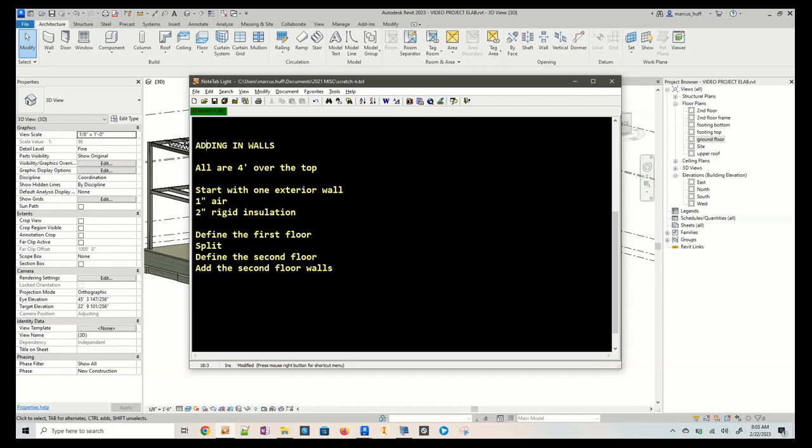When we're done, it'll look like this. We'll have single story, 2 story, and then a second story only, and everything is 4 foot above the level. The 4 foot wall acts like a rail.

So we're going to go to the ground floor and we're going to add a wall. First thing we need to do is make a custom wall. Click on this drop down and scroll to the top, find exterior brick and CMU on metal stud. We're going to edit the type.

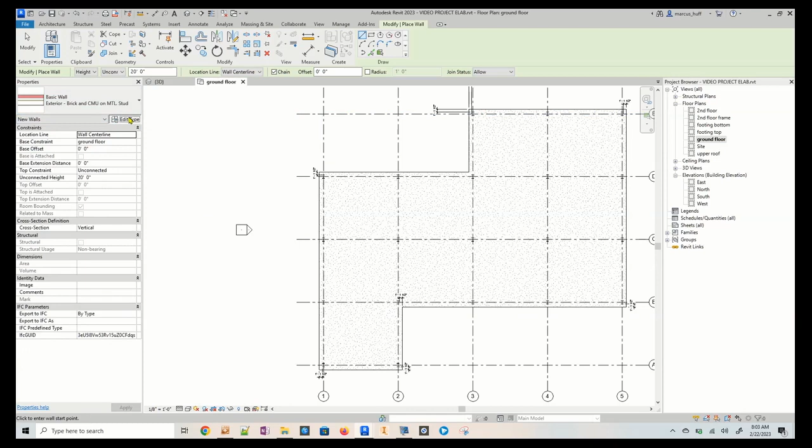Okay, let's take a look at what's going on here first. If you go to the preview, this is what modifying the wall looks like, but here's the section view, and you can see it's kind of fancy. It's got a cap and a soldier course and then some reveals and a different style of brick at the bottom. So we need to make a couple of changes here.

So we're going to start with this basic wall. I'm going to call it EXT wall number 1, because we're going to add a 2 and a 3, maybe a 4. Right here, if we go to edit, you can see we have a 3-inch air gap. It's a thermal insulation layer. So what we're going to do is change that air gap to 1 inch.

And then I'm going to insert a row and put it in the wrong place, so we're going to move it down. It needs to be after the air gap. We're going to change that to a thermal layer.

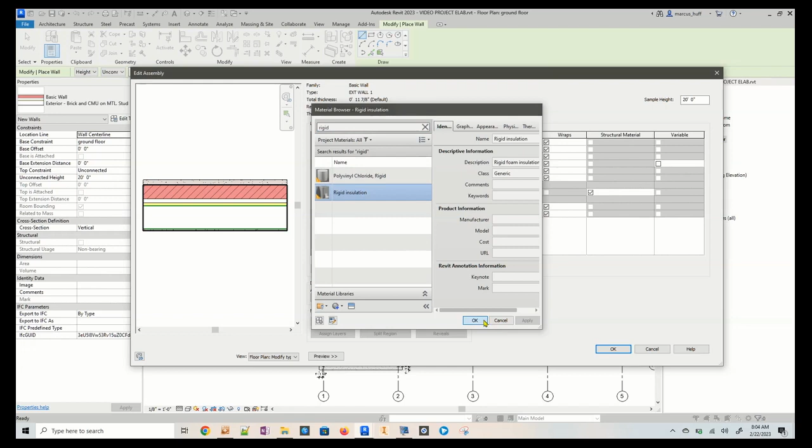So choose the drop down here, and then we're going to change the category, search for the word rigid. We're looking for rigid insulation. Okay, so there's our rigid insulation, select that. So we still have the same gap, but what we've done is added 2 inches of rigid insulation and a 1-inch air gap. The width didn't change, we just changed what the makeup was, okay?

What we're going to choose instead of center line, we're going to make sure we're connecting to exterior finished faces. We have chain set. If you have a rectangular building, just use the 2-point rectangle on your extreme corners. I don't have a rectangle, so I'm going to use the line tool connecting to the outside edges all the way around the building. Make sure I have that little pink square before I click, and make sure I'm following that outside line that I can see from my foundation.

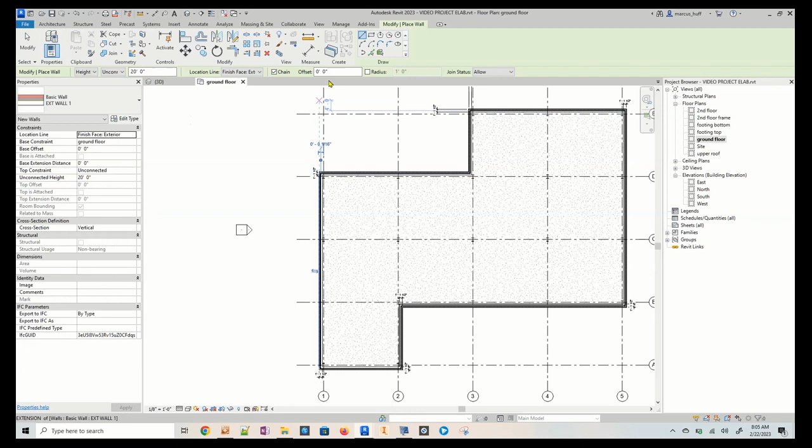And we're just connecting that to our foundation wall all the way around. I'm going to make sure that closes, and then I should be good on that. Hit escape a couple of times. Oh wait, it's not, it's unconnected. Okay, so let's go look at this in the 3D view. So what it did is it made a 20-foot unconnected wall, and that's not what we want.

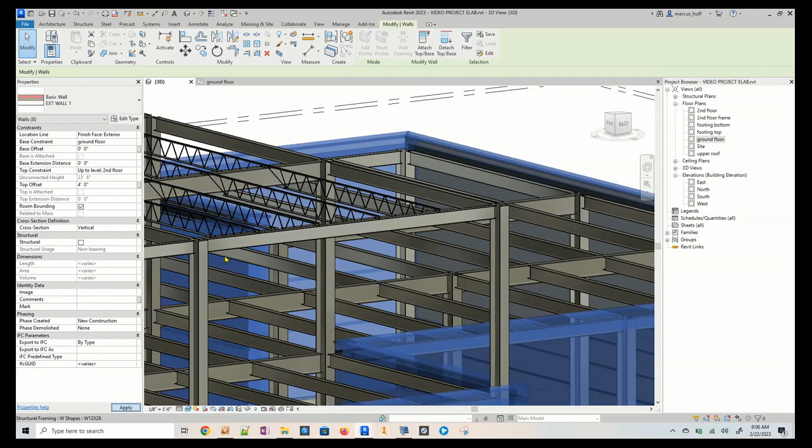We want to have it connected to the second floor with a 4-foot offset. So I'm going to select all of my walls that I just made, and then we're going to change top constraint to upper floor. No, I mean second floor. And we're going to make that 4-foot. So it's second floor and a 4-foot offset. This is going to establish a boundary around the building that acts like a rail for your green roof.

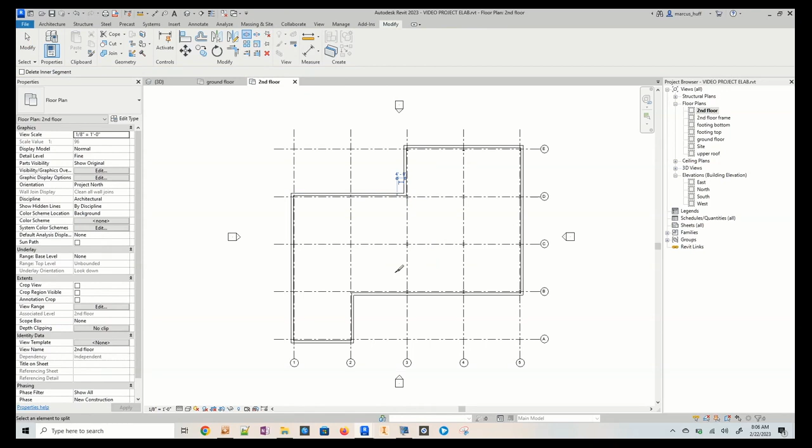But now we have a second floor that still needs to have a wall around it. So what we have to do is separate the first floor from the ones that have 2 floors. To do that, let's go to second floor, and we're going to click on a wall. Oh wait, set the view to fine for these steps because it's easier to do it this way. So make sure you're in view and fine. Choose a wall, and what we want to do is use the split element tool, and somewhere close to the second story wall, I'm going to split those 2 walls.

Okay, press escape a couple of times, zoom in, click on this little itty bitty wall, grab the little dot and drag it, and that will open a gap.

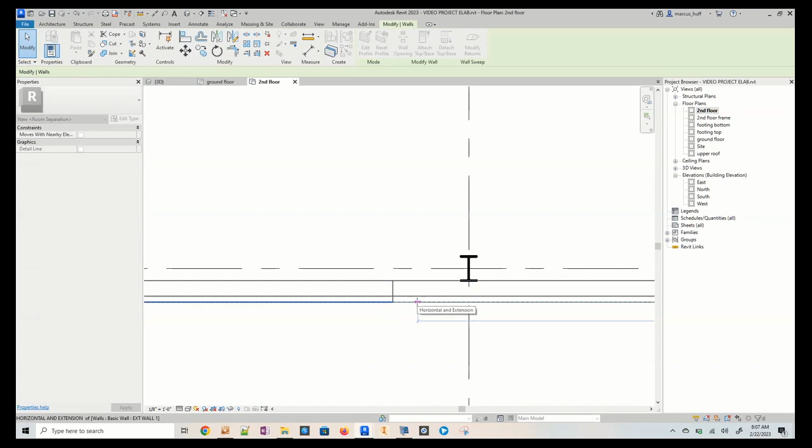And then we're going to do the same thing over here. This way it's easy to tell which wall we're working with. Now we can take this and open that gap up, and now we have our wall.

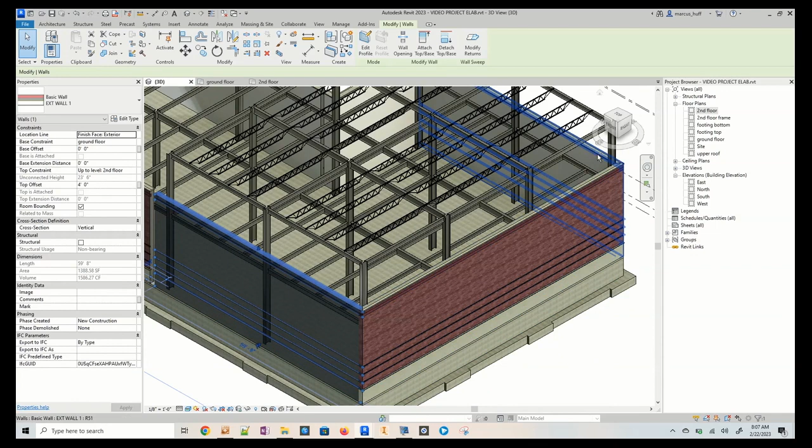So what we're going to do is look at that gap, and then we can go to the second floor and we can see the gap. So at this point I want to move this to the upper roof, so I'm going to select all of those. If you watch carefully, you'll notice I miss a wall, but that's okay, we'll get it later. So I'm going to choose all my walls that I want to go to the upper roof, select those, and make sure we continue with that 4-foot offset, and that's going to add a rail around the top roof as well. And then we've got it put in place.

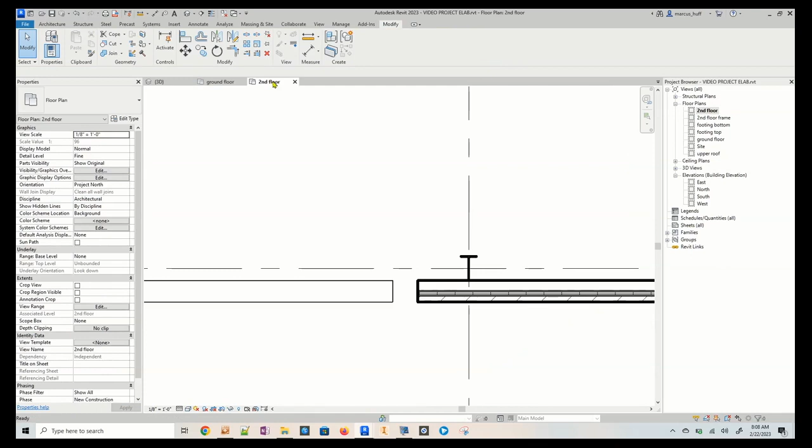And now we're going to try to add this wall that goes just on the second floor. So it kind of needs to go between, we're going to get rid of this little thing. It's going to cause problems later. And then we're going to align these two.

So I'm going to click on the align tool. All right, here, and I'm going to choose that inside edge and then that part. So always choose what you're moving to and then the part you want to move. So now those are lined up on the inside, so we won't have any disconnect.

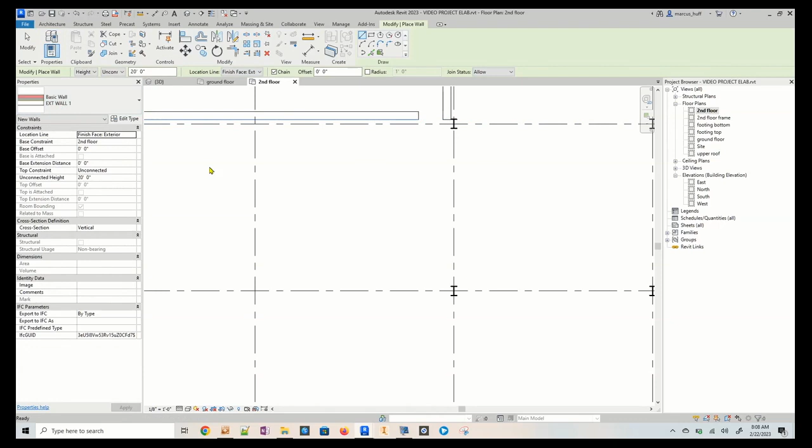And that'll be fine. So what we're going to do is we're going to draw a wall not connected to anything, just kind of in the middle here. We're going to clean it up after we get it drawn.

Starting from the bottom to the top, that should put the arrows on the outside. Verify that the arrows are on the outside of your wall. So I selected the wall. There it is.

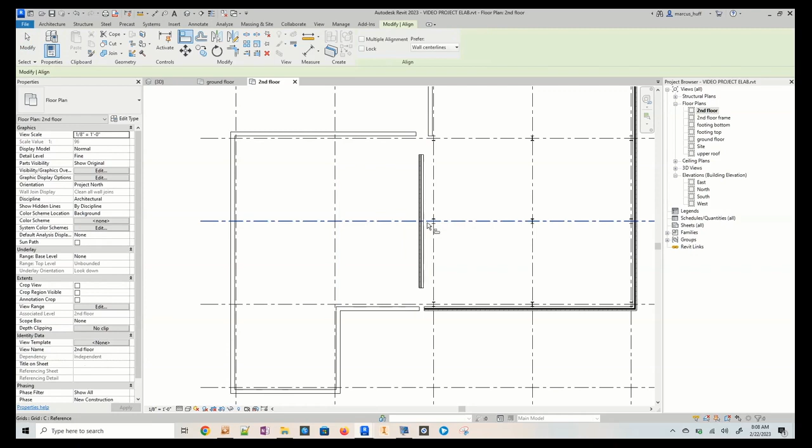So now we're going to zoom in and use that align tool one more time. We're going to align and zoom in. And on this grid right here, I want to zoom into the little tip, this part right here. See how it's blue? Not the long line, just the little tip. Click on that tip, and that's what we're aligning to. And we're going to choose the inside face of that wall, and that's going to scoot the wall right up perfectly onto that column. Okay, that's what we want. And now we have to do some alignment.

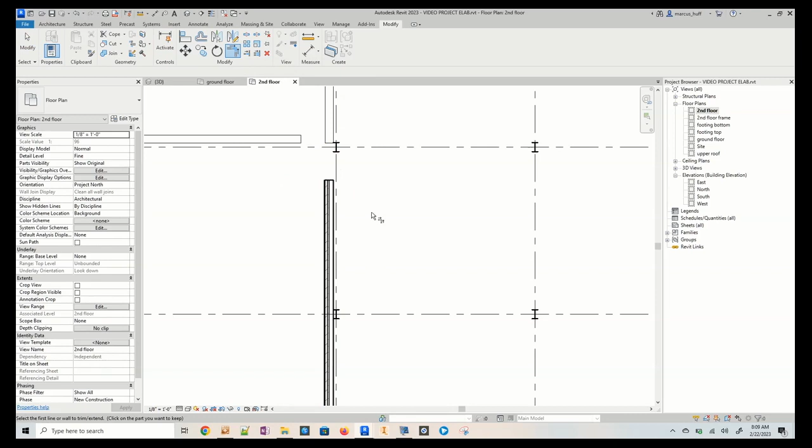Let's look at trim and extend. These two will trim and extend. So I'm going to choose this inside wall and then the outside wall. That fixes that, but it won't work here because these are two different levels and that sort of thing.

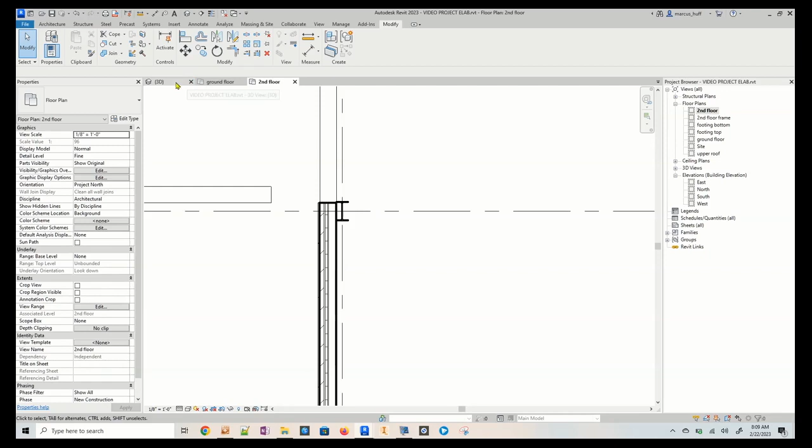So what we can do is use the align tool. I'm going to align to this face, and then choose this face, and it's going to move those two together. And then let's go take a look at that. And then this is where I figure out, oh, I didn't make that the right height. So I'm going to rotate around.

Oh wait, that's unconnected. So let's fix this. We're going to click this wall, attach it to the second or the upper roof like we did the other walls. The key to this is make everything match on a level. We're going to add that 4-foot offset again. And now everything's connected there.

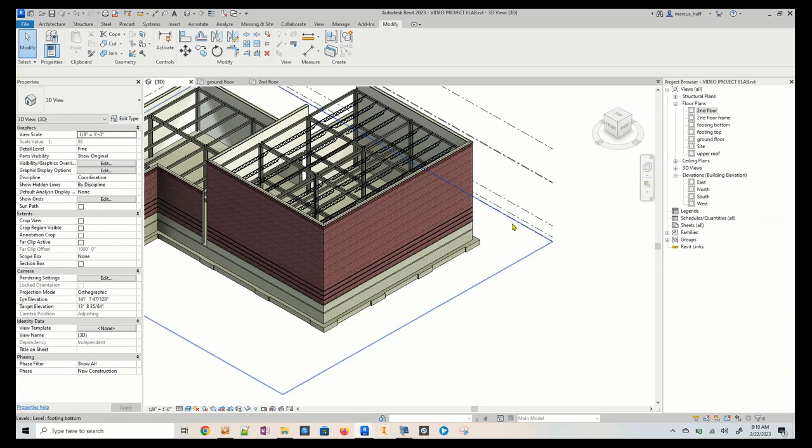And then I have this wall over here. So I'm going to shift and center click and orbit around and fix this wall. So boom. And we're going to change that from second floor to upper roof. It still has a 4-foot offset. And then that's all connected and life is good.

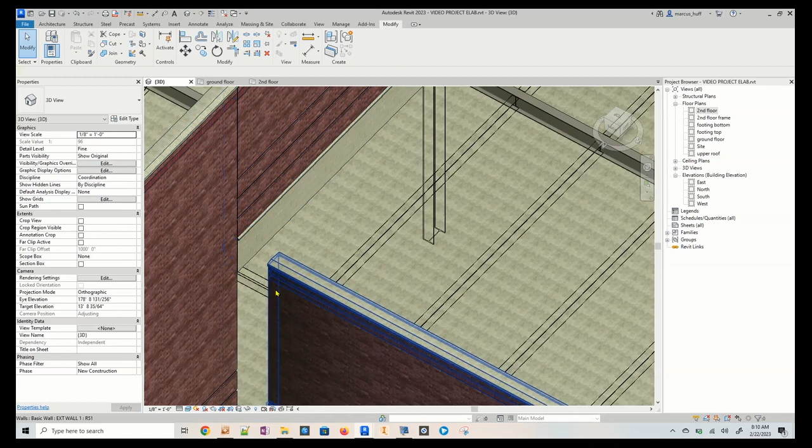So you can see we have different types of walls here. This is what we're going to clean up in the next video. But now I have to fix these gaps.

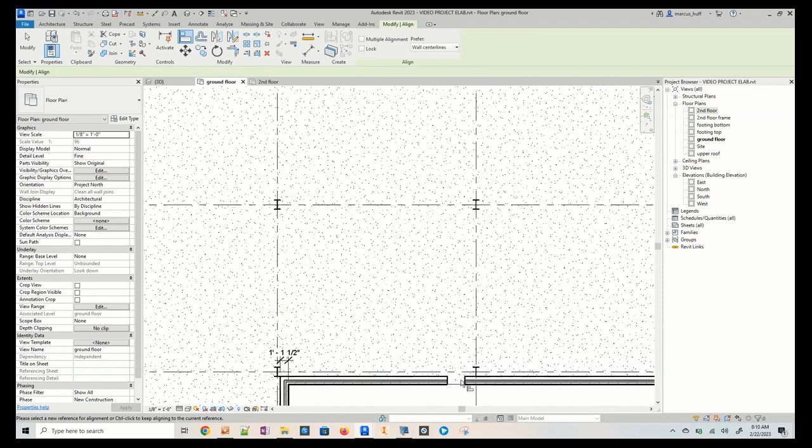Easy way to do that is just go to the ground floor plan, and we're going to use the align tool one more time. So I'm going to choose the outside face of this wall and the inside face of that and connect those, and the outside face of this wall and the inside face of this. So we're moving the first floor and connecting it to the second floor.

Okay, when we go to the 3D view, everything should be aligned properly, and we are ready to add some details, and then we can add some roofs. All right, and a second floor.

Notice how we've got clean miters here.